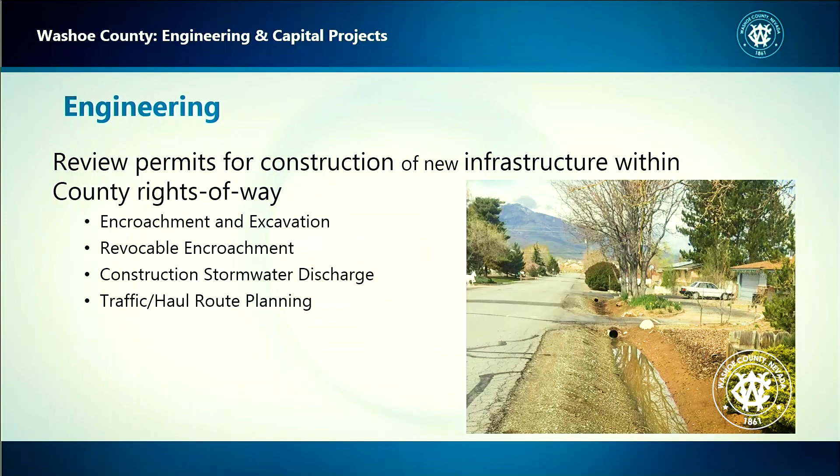We also review and condition new development to ensure compliance with Washoe County Code, design standards, and ordinances. We also review permits for construction of new infrastructure within the county rights-of-way. We review encroachment and excavation permits for street cuts, revocable permits for new infrastructure like driveways, construction stormwater discharge permits for stormwater maintenance, as well as traffic and haul route planning.

Let's take a look at some of the special projects we work with. These are a few examples of Nevadans helping Nevada. The first project is the Lake Tahoe Clarity Program, where Washoe County works with entities within the Tahoe Basin to reduce contaminants entering the lake and make sure that Lake Tahoe stays clear. We achieve this through stormwater system design and roadway operations.

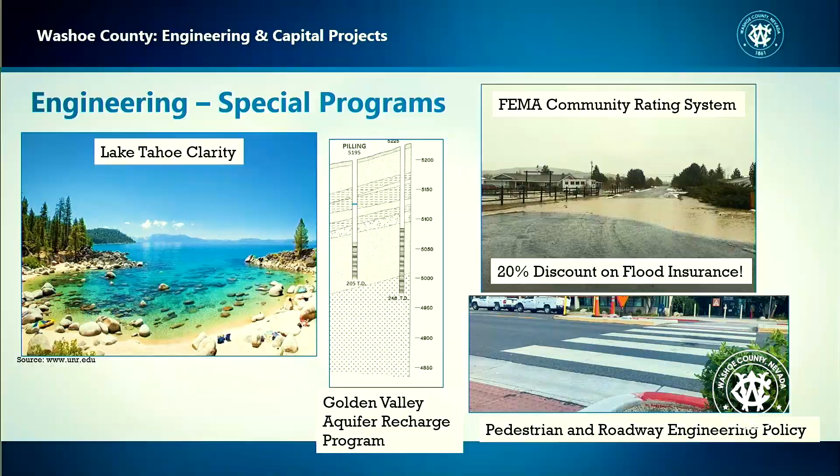Another project is the Golden Valley Aquifer Recharge Program, where the county established a water recharge system to preserve groundwater within Golden Valley and make sure domestic well owners have water in their wells. We also participate in the FEMA Community Rating System, where we maintain a high standard of floodplain management and minimize the impacts of flood on our community. One of the main outcomes of this project is that all property owners within the areas of significant flood risk receive a 20% discount of their flood insurance through FEMA. And that's all because of our attention to the floodplain management.

Another huge project we work with is the pedestrian and roadway engineering policy, which levels the playing field of all road users. Any individual can come to our office and request roadway safety improvements, and we can implement these improvements to make our roads better and safer.

Here's some key facts of the engineering group. We are a technical resource for engineering services for individuals, companies, and other agencies. We are also a regional leader in emergency flood response, maximizing the use of reclaimed water, and managing our water resources. So that was a brief showcase of the topics that the engineering group deals with. And with that, I will introduce Kat from our surveying group.

Hi there, my name is Catherine Hyde. I'm a member of the survey team at CSD, and I want to introduce my teammates. First, Wayne Handrock, he's the county surveyor. And on my other side is Matt Philimale, a licensed surveyor and geomatics specialist, and I'm the geomatics technician.

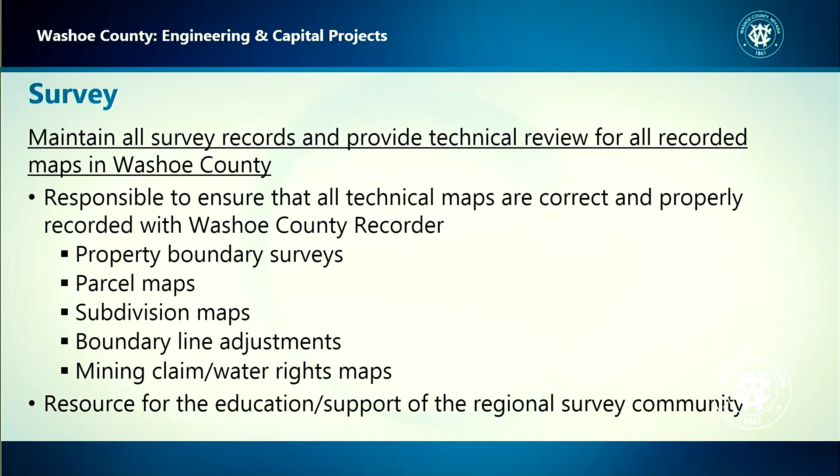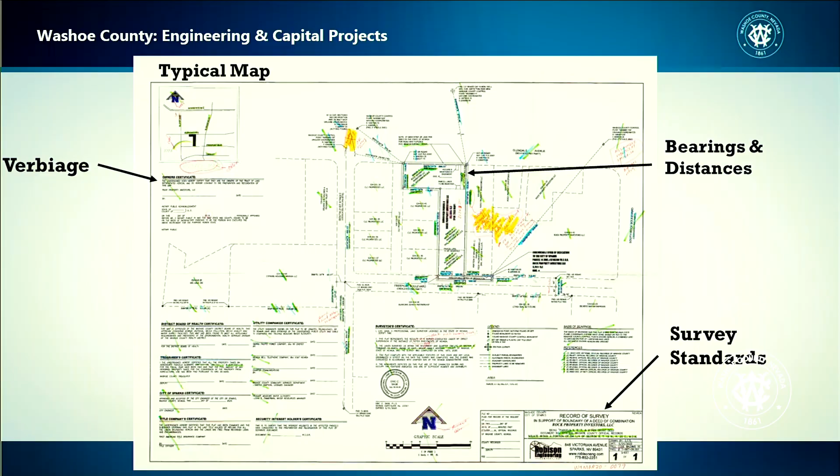Next slide. So here's an example of a typical map submitted to us for review. Anytime a property line is moved or created, our group checks the maps. We check the verbiage to make sure it fits and meets the requirements. We check distances, directions, and curves. They have to match existing parcel lines, and the parcel lines have to make sense within the new boundaries. We check the map to make sure it follows the survey standards of practice, including county and state law. Finally, we check the paper map as well as the AutoCAD file for these and a lot of other items on our checklist.

Afterwards, we get back to the submitter with what they need to fix. We re-review that map, and then we oversee the recording.

Some key facts: our group reviewed over 250 maps last year and oversaw their recording. We support the Regional Street Naming Committee, of which Wayne is chairperson. He's also the subcommittee member for the Nevada Technical Board of Engineers and Surveyors, and we have a combined 60 years of technical survey experience.

Thank you so much. I'd like to introduce Brian with CTMRD.

My name is Brian Bass, and I'm the interim program manager for the Central Truckee Meadows Remediation District program. I'd like to introduce our team. We're a small but very, very fierce team.

Bonnie Weller is on the left there, she's our GIS and database guru. After her is Rick Erdman, our field operations manager. Scott Bayshard is one of our senior hydrogeologists, and he is the manager of the groundwater monitoring program, amongst other things. And the last guy on the right, we're still trying to figure out what he does. But next.

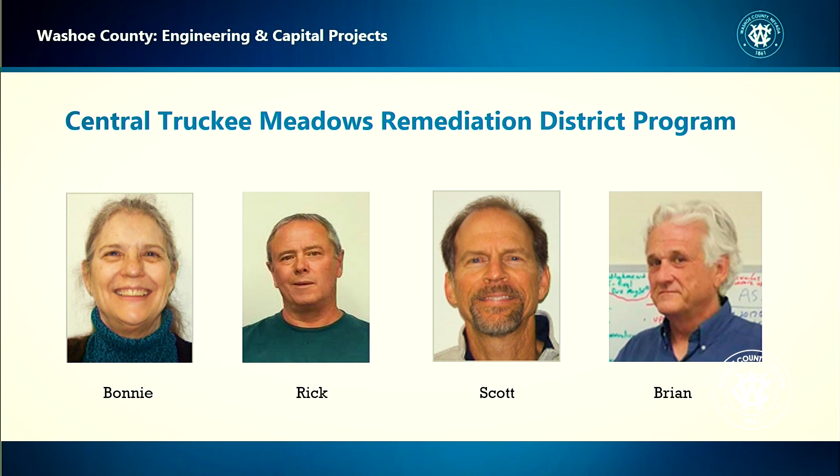So how many of you know what CTMRD does? I said, how many of you know what CTMRD does? Three. Oh, oops, two. Okay. How many of you know what PCE is? Just about as many. And how many of you came here specifically for this presentation on CTMRD? Everybody. Wow, that's great. Thank you.

So the Central Truckee Meadows Remediation District Program, our objectives are to remediate and mitigate existing PCE contamination in both groundwater and soil. We'll get to exactly what PCE is here in a moment.

Secondly, our objective is to prevent PCE from contaminating portions of the aquifer that are not contaminated already. Thirdly and fourthly is to inform and educate stakeholder agencies, the public, and the business sector on what it is we do, and that includes our achievements and what it is that we do. Next. Thank you.

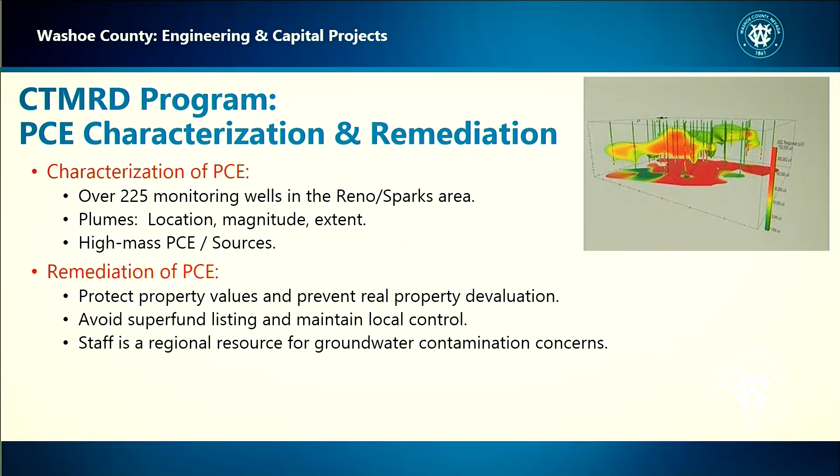Our staff is also a regional resource in Northern Nevada for PCE contamination and other groundwater contamination concerns. That figure you see up on the right is a representation of a model we put together for each of those plumes, the PCE plumes. They're complex — some of them exist in various layers throughout the subsurface.

So here's some quick PCE facts. PCE is also known as perchloroethylene or PERC, also tetrachloroethylene. It is a man-made solvent, fairly ubiquitous in industrial cleaning activities, also in dry cleaning, and to a lesser extent in paints, adhesives, and insecticides. It's a very common additive for a lot of things.

It is designated a probable human carcinogen. It is very, very toxic.

We have remediated approximately 40 billion gallons of drinking water since 1996, taking it from undrinkable water to drinkable water. We've removed 25 to 30 gallons of PCE from the aquifer each year. That might not seem like a lot to some of you, but it is a lot, and it's all relative to how toxic your contaminant is.

PCE is extremely toxic. In fact, 1 tablespoon of PCE can contaminate all the water in 2 Olympic-sized swimming pools beyond the safe drinking water standard—you can't drink it. That would be about 1.3 million gallons. Just picture a tablespoon of something contaminating 1.3 million gallons. That's how toxic it is.

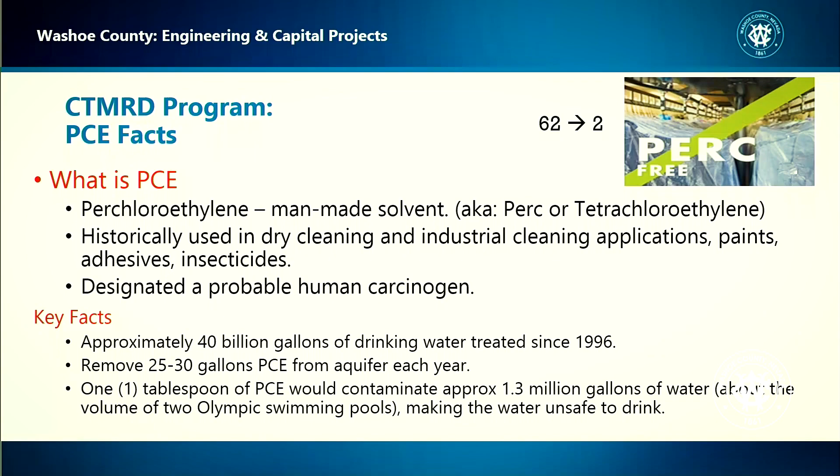Back in the early to mid 90s, when the program came into existence, there were 62 dry cleaners in the Reno-Sparks area that were PCE using dry cleaners. But as part of our outreach activities, including guidelines and manuals, visiting dry cleaners and talking to the owners, trying to convince them to switch over to a new cleaning process which doesn't use PCE, we took that number down from 62 to today where it's 2 dry cleaners using PCE. That is a not so well known part of our program, and a very, very successful part of it, and one that I'm very proud of, that we've been able to achieve that.

Let's see, I think that's about it. I'm running ahead of time, but any quick questions? I don't see my 1-minute card up yet, so. Okay, so any questions? That's it?

Are they what? Nope, they just haven't converted yet. We're keeping on them.

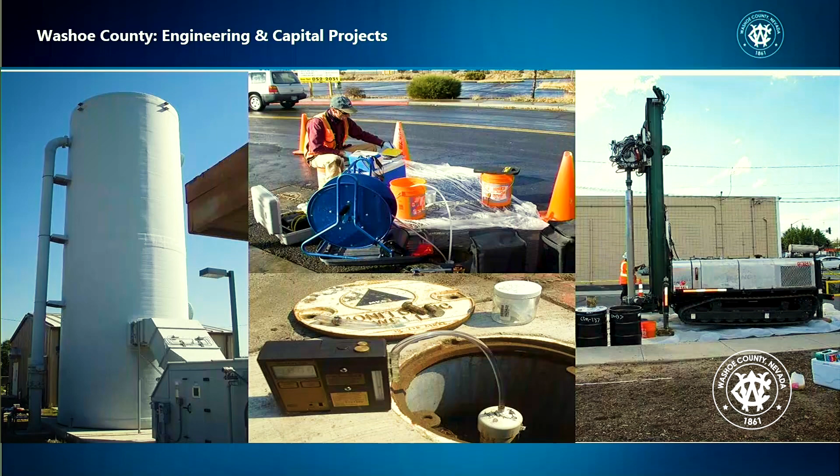So welcome. As he said, my name is Shane O'Neill. I've been with Washoe County Utilities Department for about 3 years, but I've been with Washoe County for 27. Up here on the screen, we have the amazing team that I get to work with every day. One of them's even sitting up here in the seats over here. Thanks.

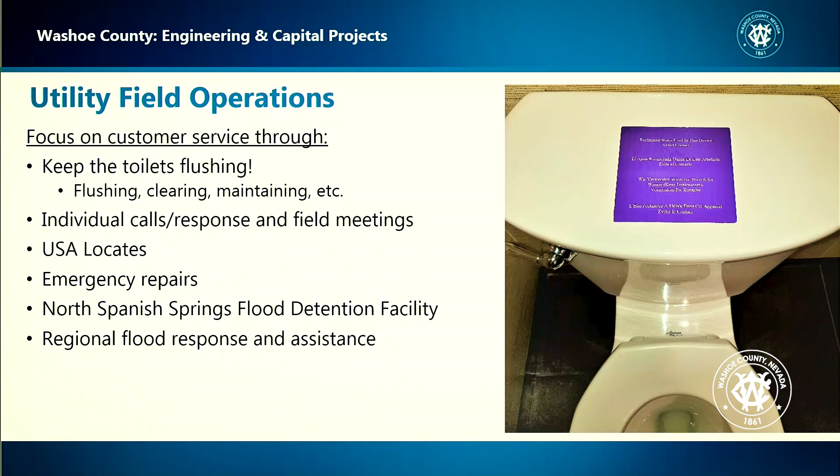At the utilities field operation, our job is to keep the toilets flushing. So unless you have an outhouse in your house, we affect everybody here. We do this by hands-on commitment to high-level customer service at the lowest cost to our citizens in the Truckee Meadows. We're available 24/7 for everything from calls in the field to meetings with customers and contractors, and we regularly respond to emergency repairs, 811 USA locates, general system flushing and maintenance on both the sewer and reclaim systems. We also maintain the North Spanish Springs Flood Detention Facility and respond to emergency weather-related events like flooding and snow with our local partners.

Our focus is to meet federal, state, and local permit requirements and produce Class A reclaimed water for irrigation and construction use such as dust control.

Our division operates like a private company, generating our own revenue. New development and connection fees help pay for capital project improvements, like the Stead WRF expansion project, and user fees paid by businesses and homeowners pay for our maintenance costs and operational costs such as salaries, equipment, and parts.

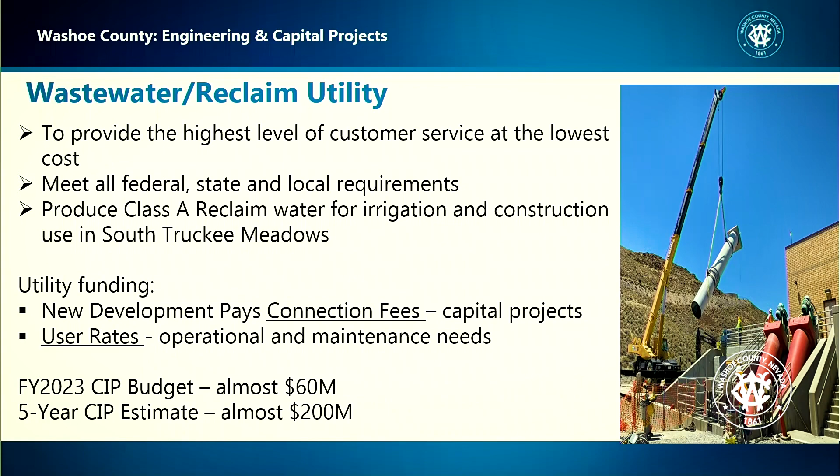We do cover a lot of territory. We service South Truckee Meadows, Lemmon Valley, North Spanish Springs, and Cold Springs. We also provide support for 3 water treatment plants—South Truckee Meadows, Lemmon, and Cold Springs—and our collection system serves over 25,000 customers. As you see on the slide here, we have 6,800 manholes in the system and physically inspect about 1/3 of those every year.

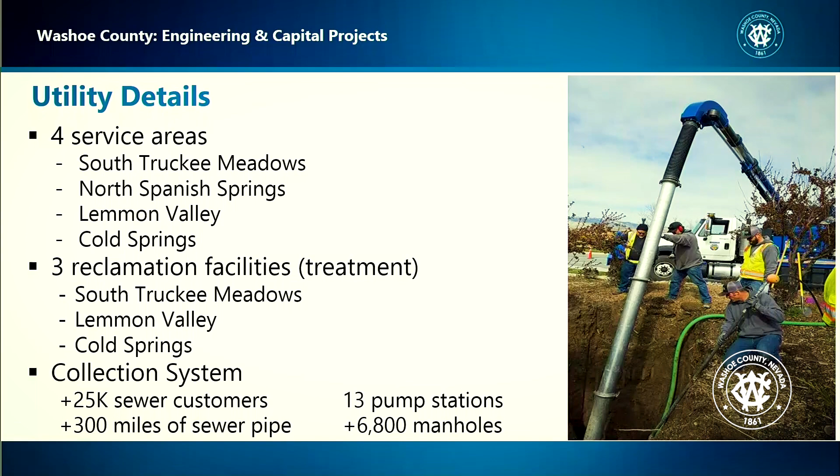So anywhere that you see those purple signs around South Truckee Meadows, you'll find one of our 460 reclaim customers. This includes golf courses like Arrow Creek and Wolf Run, schools like Marce Herz, Arrow Creek, Bishop Minogue, and parks like South Valley's Regional Parks and Sports Complex, plus roadside landscapes within neighborhoods and most construction fills.

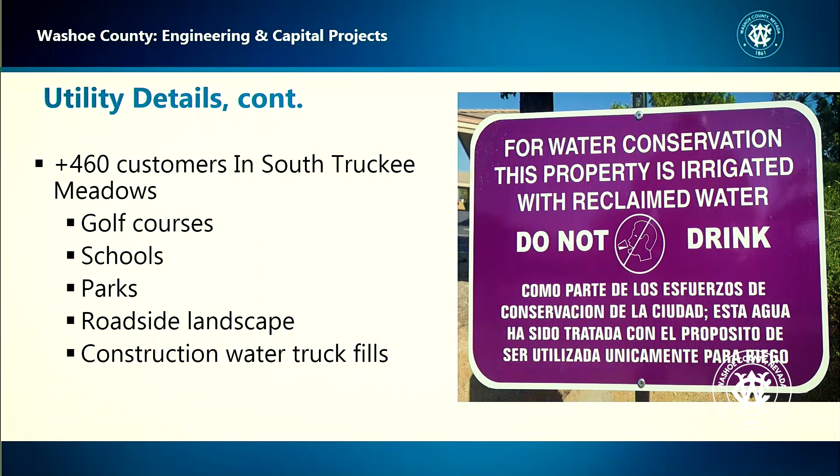Every gallon of reclaimed water we use in our area is a gallon of water that stays in the Truckee River for drinking.

A couple utility facts: we constantly strive to stay in front of growth in our area through building and maintaining our system. Our goal is to effectively plan, budget, and implement Washoe County's strategic development plan for the health and safety of our community.

Two interesting notes: the I-580 bridge in Washoe Valley, the big one, was all batched with reclaimed water. And we receive wastewater from as far away as Mount Rose Ski Resort.

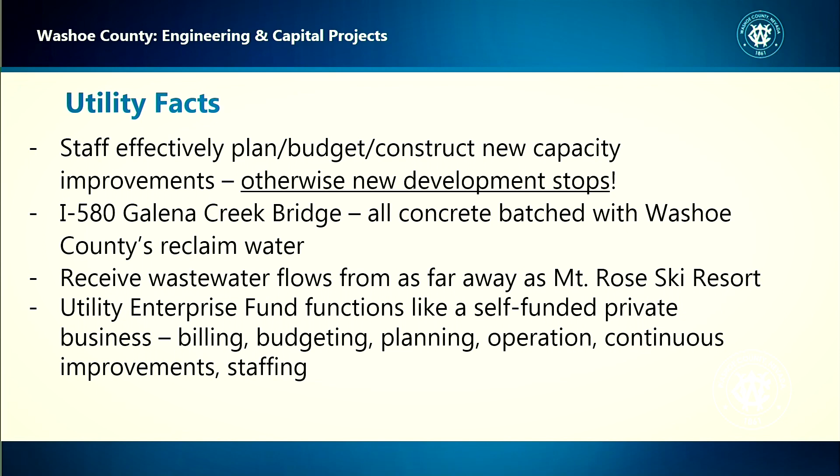The next picture shows the tip of the spear in our emergency response and maintenance - this is our newest combo truck. We bought it for a cost of about $500,000, and it really helps us do our job on a daily basis. So that's about all I have.

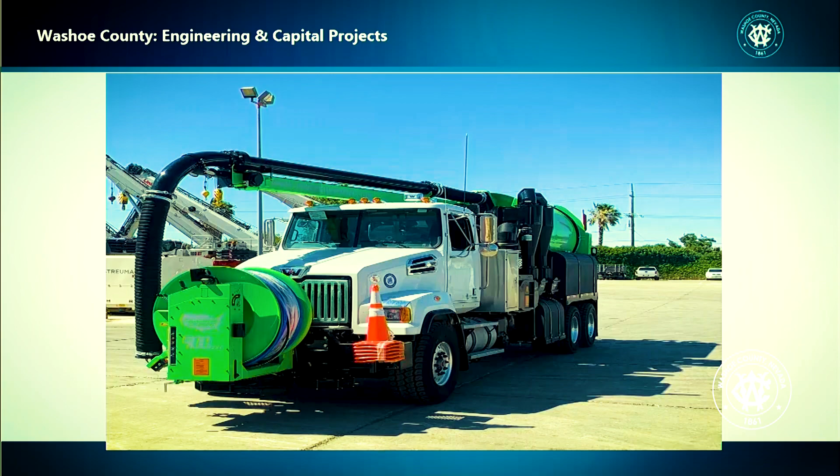So why is civil inspection important? First off, we ensure public safety, not just for our residents and visitors to Washoe County, but also for the construction workers installing underground utilities, building subdivisions, and paving streets. Secondly, our team oversees the construction of new infrastructure and makes sure it's built per all the plans and codes we have available.

We also review, issue, and inspect encroachment excavation permits for work that impacts Washoe County roadways. This group issues a few hundred of these permits each year.

Here's some examples of what else we do. We collaborate with the Capital Projects Group during plan review. We coordinate with the engineering group for the installation of storm drains, sewer lines, and any natural disasters. Our group provides the QA and QC for all the soils, pavements, and asphalts for new construction.

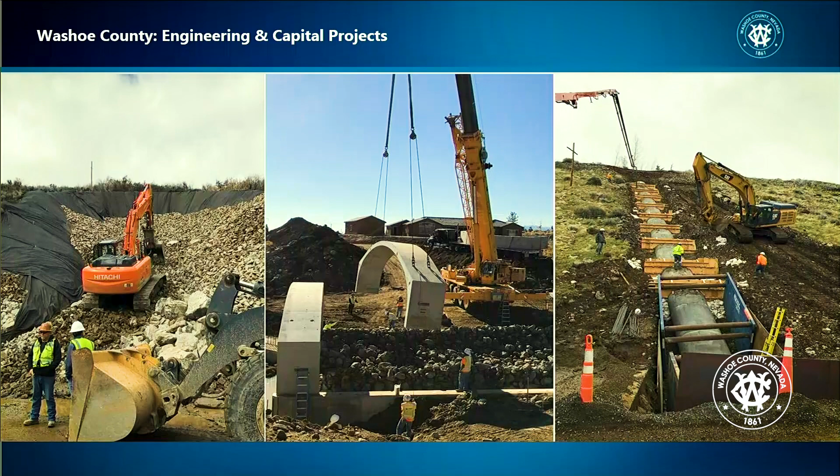We work directly with contractors, utility companies, and developers, coordinating that all these jobs are done right. Here's a couple photos - the second photo shows bridge construction spanning over Whites Creek along Mount Rose Highway, and we're fortunate to be able to do the inspection on that project.

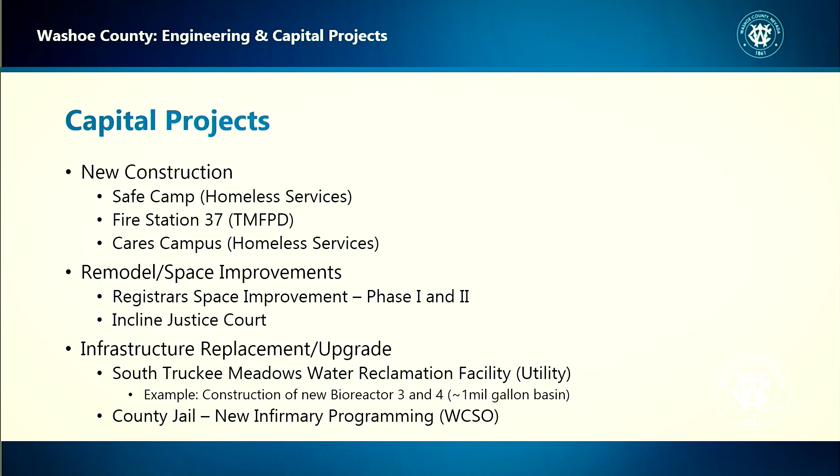These projects are all a little bit different. Some are complex, some are not, and we assign them to project managers who may have bandwidth or have expertise in those particular projects. So we kind of get to learn a little bit, or dive into what we do best.

Oops. An example of a fun project here that didn't make it on here. This one's a little different, but we'll wing it.

So there was a presentation about the STMWRF bioreactor 3 and 4. It was a large pit, essentially, with a lot of concrete. That's a large hole in the ground there, and it holds about 1 million gallons of wastewater.

Concurrently, this is a project Megan Seislove is doing, and I'm doing a project here at the Safe Camp site, a homeless safe camp that's in the Governor's Bowl. If you're familiar with that, it's a large pit. It was where the baseball fields were. Some of you might have played baseball there.

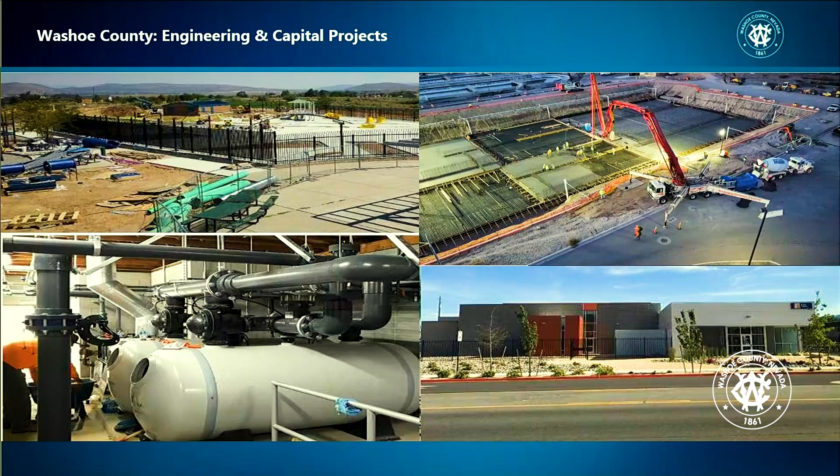Megan called me one day and said, 'Hey, do you need 20,000 cubic yards of structural fill?' And I said, yes, I do. So, long story short, we met with our contractors, we met with our engineers, and we made it work.

We were able to take that material from that hole in the ground and bring it to where the safe camp is, and we were able to raise the elevation of that safe camp - probably half of the material we needed, which is about half of the total Governor's Bowl. So that probably saved us several $100,000 or more. It was a great win for Washoe County.

I share that because that's just a great example of what we do on a daily basis in capital projects. So that concludes my presentation, and I'll turn it over to Mr. Dwayne Smith.

Thank you, team. Well, I hope all of you have learned a little bit today about the breadth of some of the things that we do in the Engineering Capital Projects Division. You probably didn't realize that our area had the potential to be listed as a PCE Superfund site. Pretty interesting. Probably didn't realize that we're responsible for the utility, and we're implementing, and thank you, Megan, as the project manager. I don't see where - there's Megan right over here.

This is a north of - I hate to say it - but about $120 million project. We hadn't planned on it being $120 million. But these are some of the things that we do to benefit our community. And again, I think my fierce team, all of them, are very fierce, and they do a great job for the community.